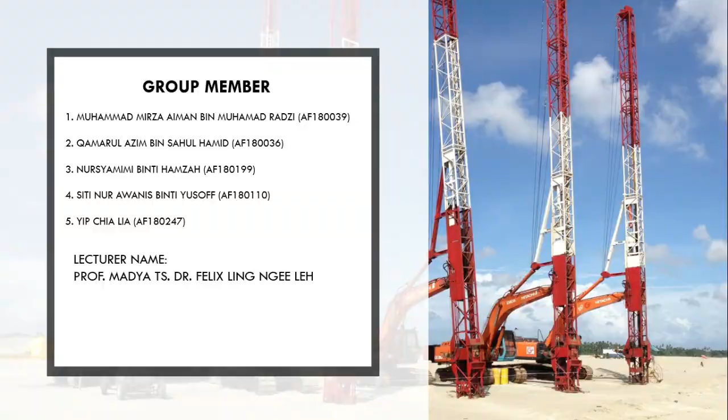So first, I would like to introduce a bit about our group project. Soil can be defined as uncemented aggregate of mineral grains and decayed organic matter, with liquid and gas in the empty spaces between solid particles. Soil is also one of the important materials used to support the structural foundation and act as the base of the building that will be constructed.

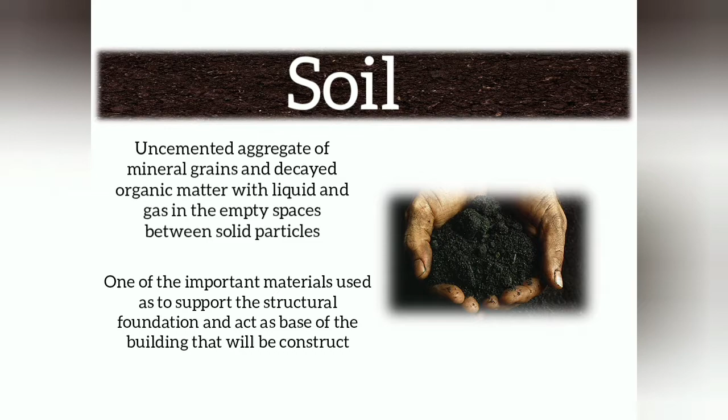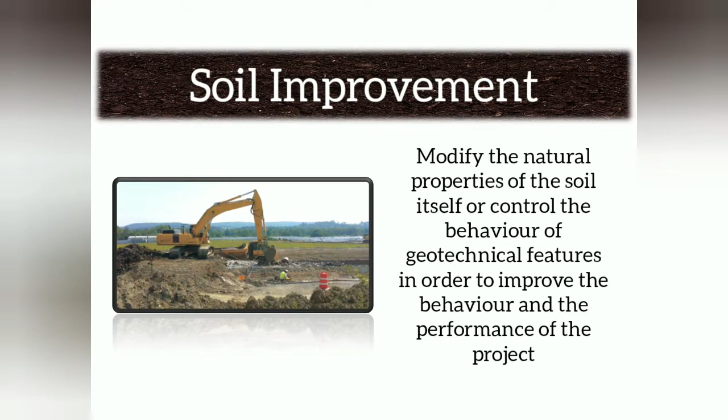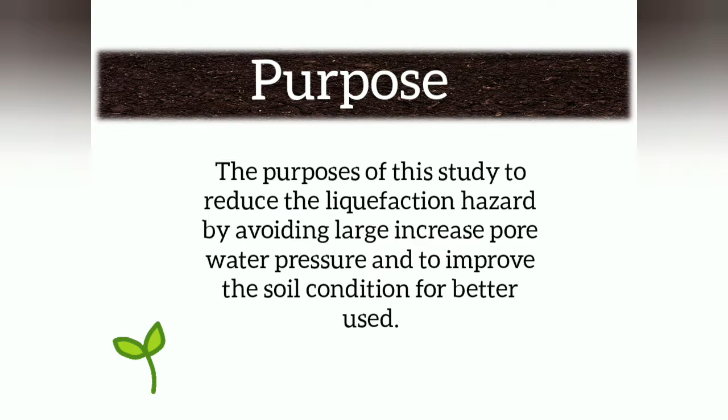Soil improvement: the purpose of soil improvement is to modify the natural properties of the soil itself or control the behavior of geotechnical features in order to improve the behavior and performance of the project. The purpose of this study is to reduce the liquefaction hazard by avoiding large increased pore water pressure and to improve the soil condition for better use.

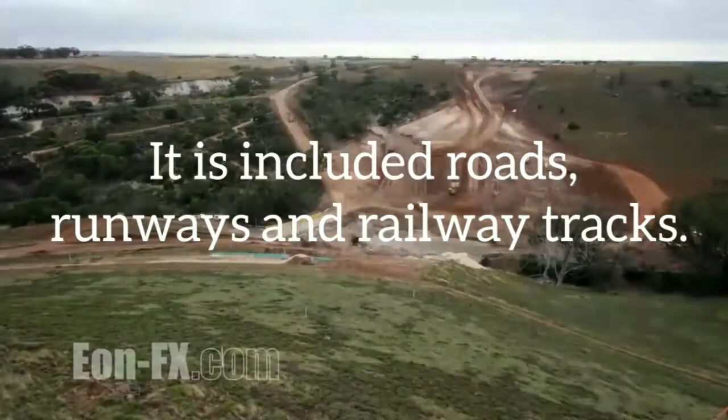The soil condition is very important for design and construction of any structure. It includes roads, runways, and railway tracks. Besides, the most suitable foundation for the superstructure is also important. The foundation engineer will follow a decision-making process to form the most suitable foundation.

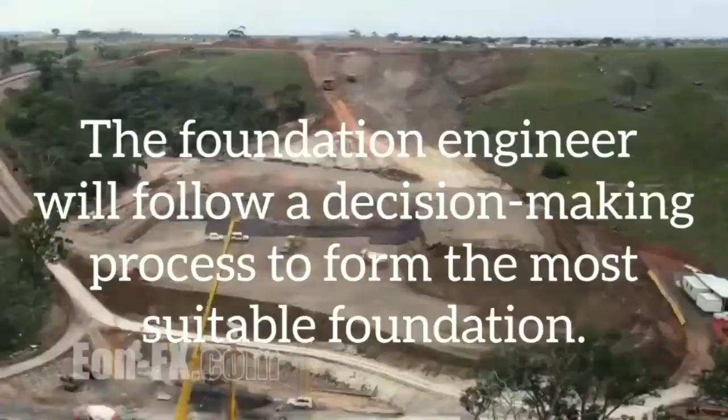These are a few conditions that ground or soil will be considered. Abandon the project: this might be considered a practical solution only when another suitable site can be found and no compelling commitments require the project to remain at the location in question, or when the cost estimates are considered to be impractical.

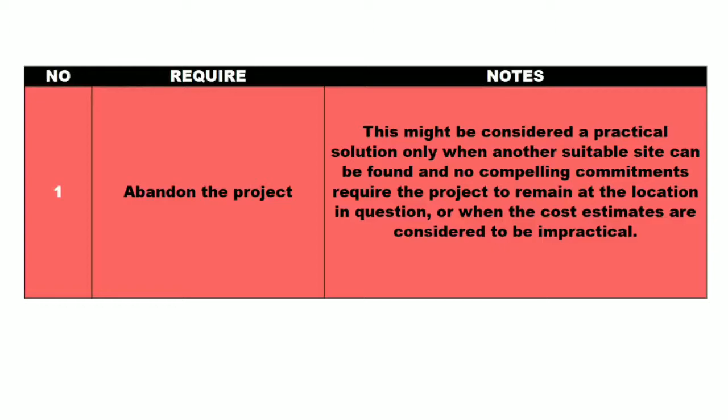Excavate and replace the existing poor soil. This method was common practice for many years, but has declined in use due to cost restraints for materials and hauling, availability and cost of select materials, and environmental issues.

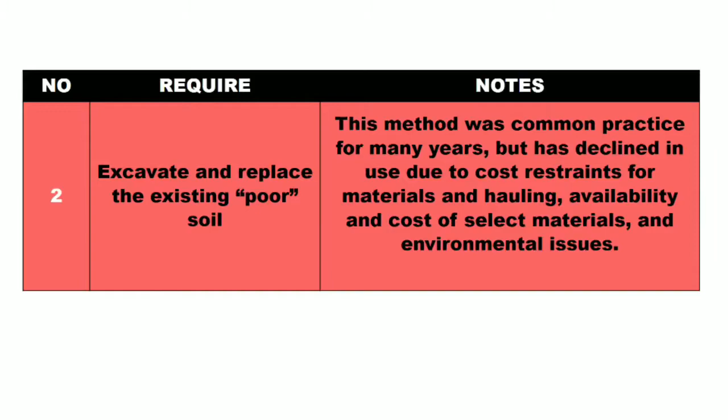Redesign the project. A common example is the use of driven piles and drilled shafts to bypass soft, weak, and compressible soils by transferring substantial applied loads to a suitable bearing strata.

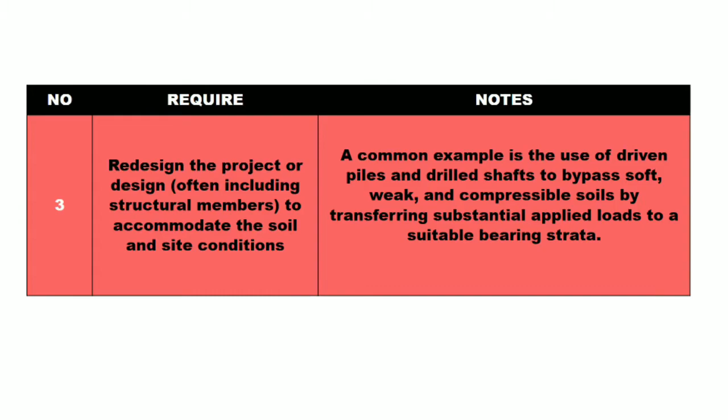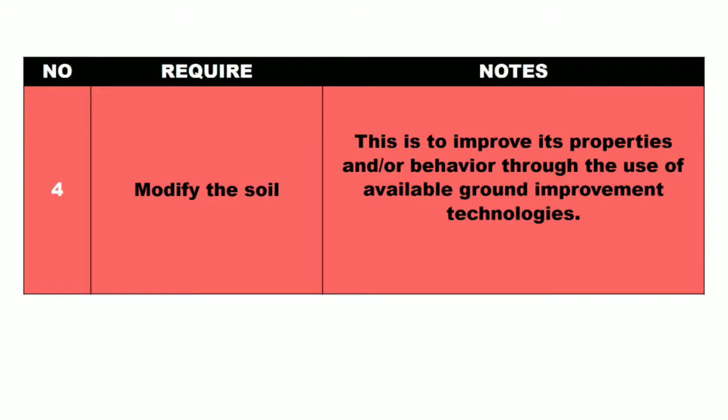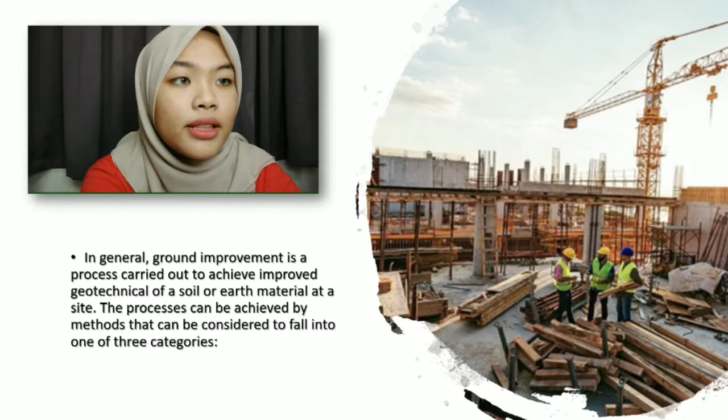Modify the soil: this is to improve its properties and behavior through the use of available ground improvement technologies. In general, ground improvement is a process carried out to achieve improved geotechnical properties of a soil or earth material at the site. The process can be achieved by methods that fall into one of three categories.

First, modification without the addition of any other material. Second, modification including adding certain materials to the soil or ground. Third, modification by providing reinforcement or inclusions into the soil or ground.

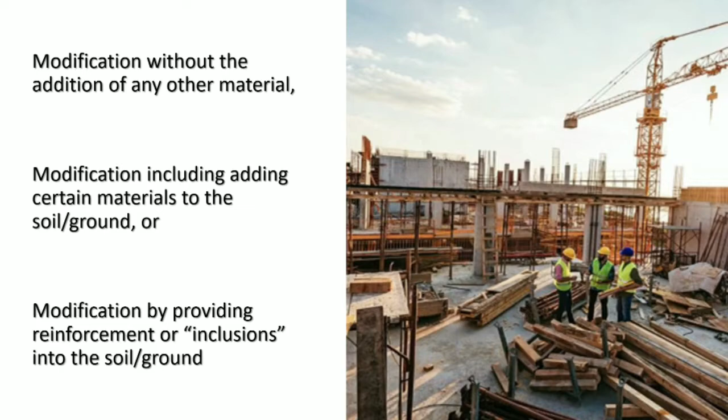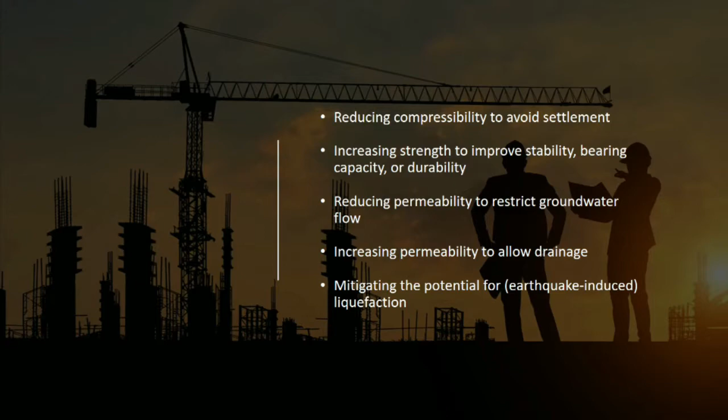The ground improvement objectives usually are: first, reducing compressibility to avoid settlement. Second, increasing strength to improve stability, bearing capacity, or durability. Third, reducing permeability to restrict groundwater flow. Fourth, increasing permeability to allow drainage. Fifth, mitigating the potential for earthquake-induced liquefaction.

There are three main techniques in improving soil condition: mechanical techniques, chemical techniques, and polymer techniques. Mechanical technique was the first method introduced. It is known by mixing two or more types of soils to obtain a material that achieves the specification. The soil blending may take place at the construction site, at a central plant, or at a borrow area.

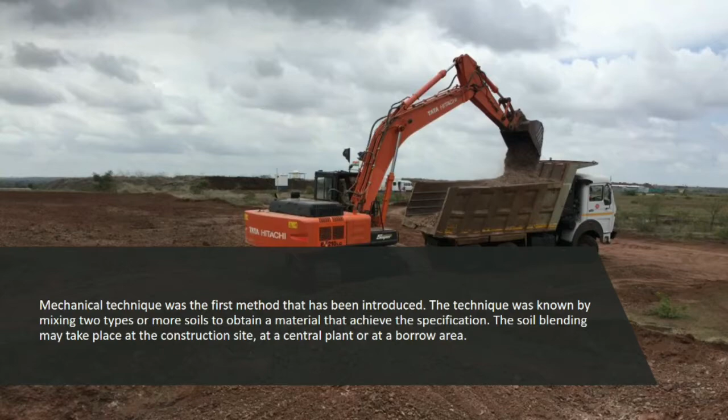For chemical techniques, ground quality is improved by adding different chemical compounds to the soil to reduce the problem. Methods used to chemically improve the soil include addition of sulfates, desalination, addition of gypsum, and admixture of soil.

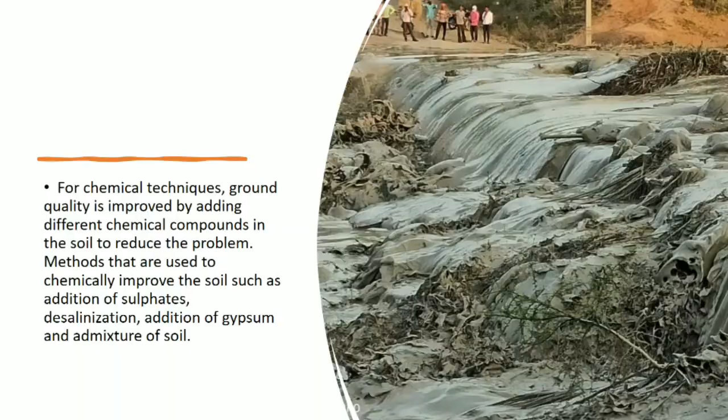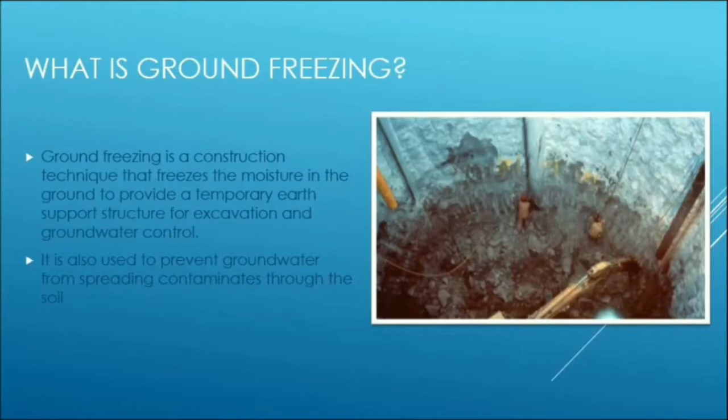Ground freezing is a construction technique that freezes the moisture in the ground to provide a temporary earth support structure for excavation and groundwater control. It is also used to prevent groundwater from spreading contaminants through the soil. The process is relatively straightforward.

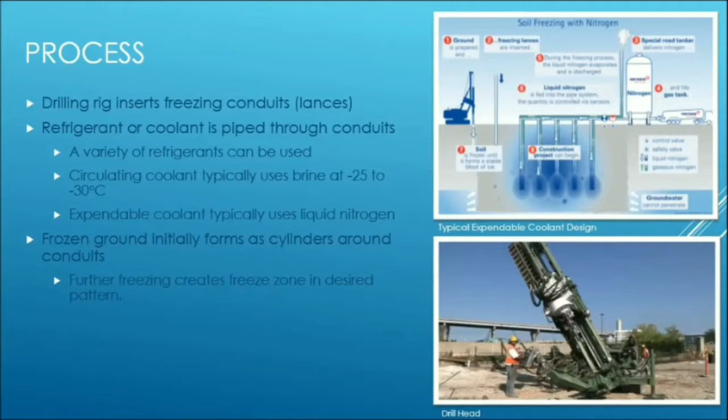A drilling rig inserts freezing conduits, which are called lances. The refrigerant or coolant is piped through the conduits. A variety of refrigerants can be used. Circulating coolant typically uses brine at -25 to -30 degrees Celsius. Expendable coolant typically uses liquid nitrogen. Frozen ground initially forms cylinders around the conduits, while further freezing creates a freezing zone in the desired pattern.

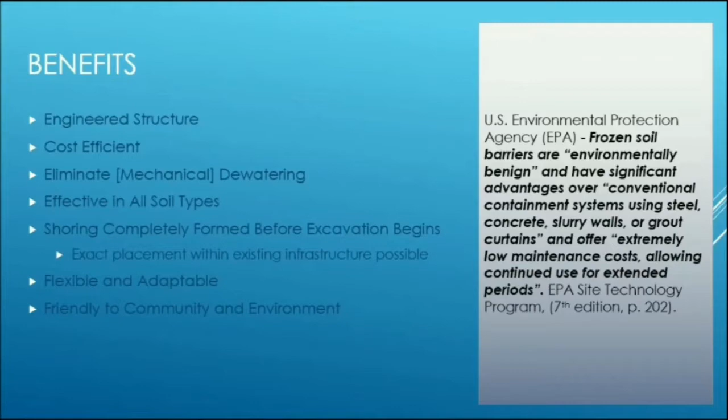The benefits of ground freezing: it is an engineered structure, it is cost efficient, it eliminates mechanical dewatering, effective in all soil types, shoring completely formed before excavation begins, flexible and adaptable, and eco-friendly.

The drawbacks of this system: it takes a long freezing time, usually 6 to 12 weeks, which does not include installation time beforehand. Next, the refrigeration equipment space needed, its high energy cost, and lastly, the hazardous chemicals in refrigerants and coolants.

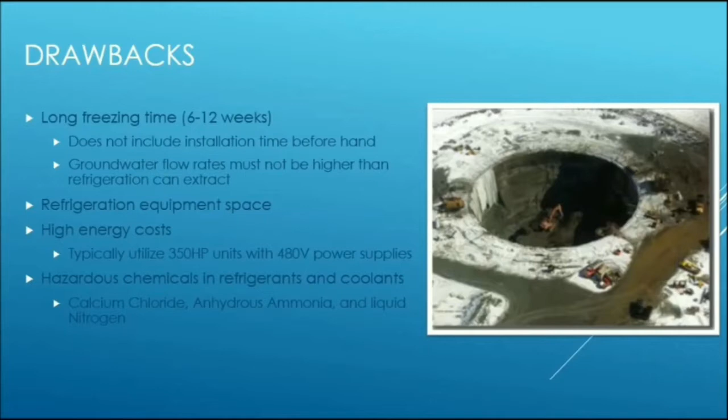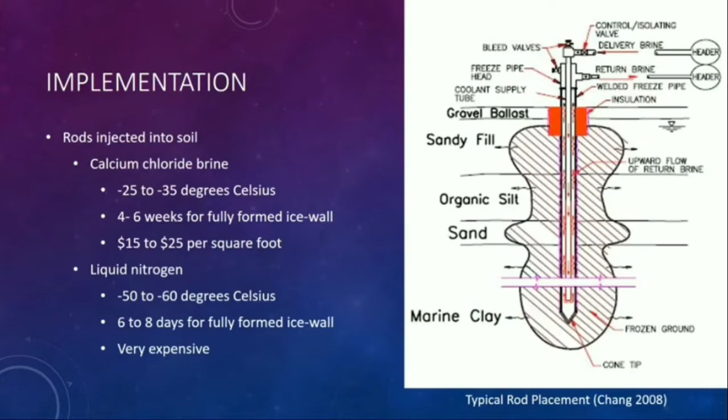A little basic implementation for the system, which is very simple: rods are injected into the soil concerned and pumped with either calcium chloride brine or liquid nitrogen. Calcium chloride is the cheaper of the two methods, with a temperature of -25.

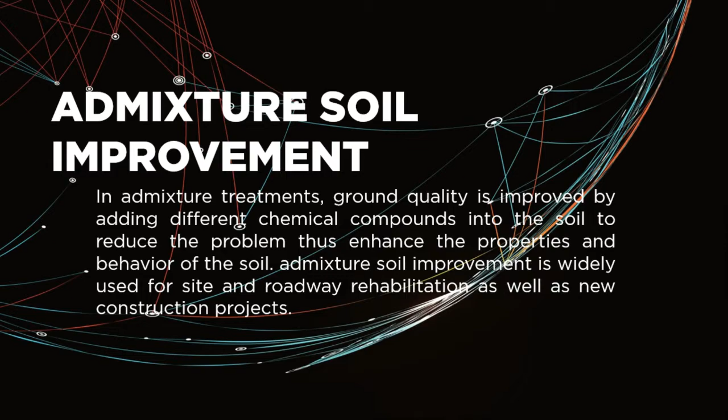In admixture treatments, ground quality is improved by adding different chemical compounds into the soil to reduce problems, thus enhancing the properties and behavior of the soil. Admixture soil improvement is widely used for site and roadway rehabilitation as well as new construction projects.

Admixture soil improvement can be greatly beneficial in drying up wet soil, improving strength, including solidification of waste for disposal assistance, providing volume stability, reducing swell, controlling shrinkage, improving working platform and workability of soils, reducing thickness of roadway layers, and slope stabilization.

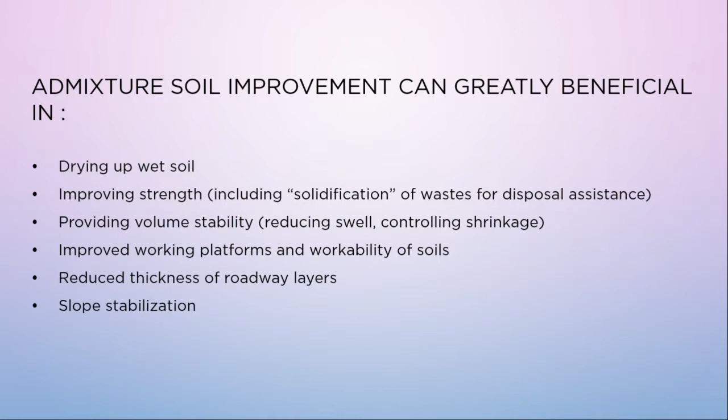For our case study, we use fly ash for the admixture. Pulverized fly ash is similar to granulated blast furnace slag. PFA is a chemical additive consisting mainly of silicon and aluminum compounds, and it's a byproduct of the combustion of coal.

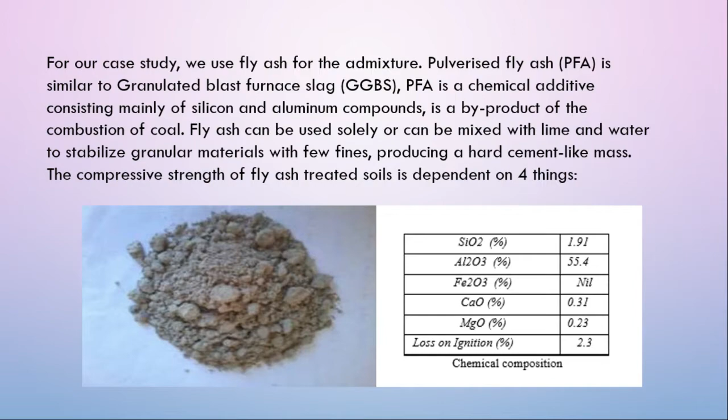Fly ash can be used solely or mixed with lime and water to stabilize granular materials with few fines, producing a hard cement-like mass. The compressive strength of fly ash treated soils is dependent on 4 things.

Number 1 is in-place soil properties. The plasticity of soils treated with Class C or other high calcium fly ash is influenced by the type of clay minerals present in the soil and their absorbed water. Soils containing more than 10% sulfates have been prone to swell excessively in some applications. Also, organic soils are difficult to stabilize using fly ash.

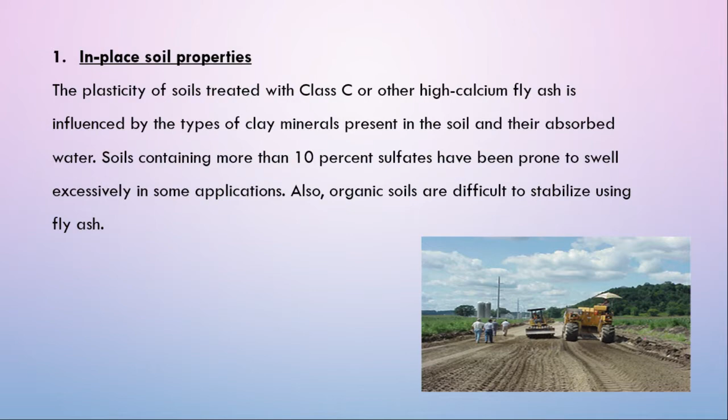Number 2 is delay time. Delay time is the elapsed time measured between when the fly ash first comes into contact with water and final compaction of the soil, fly ash, and water mixture. Compressive strength is highly dependent upon delay time. Both density and strength are reduced with increasing delay to final compaction.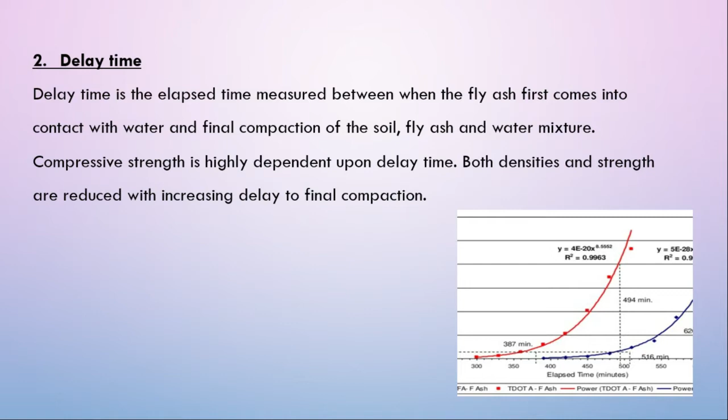Number 3 is moisture content at time of compaction. The water content of the fly ash stabilized soil mixture affects the strength. The maximum strength realized in soil fly ash mixtures generally occurs at moisture contents below the optimum moisture content for density.

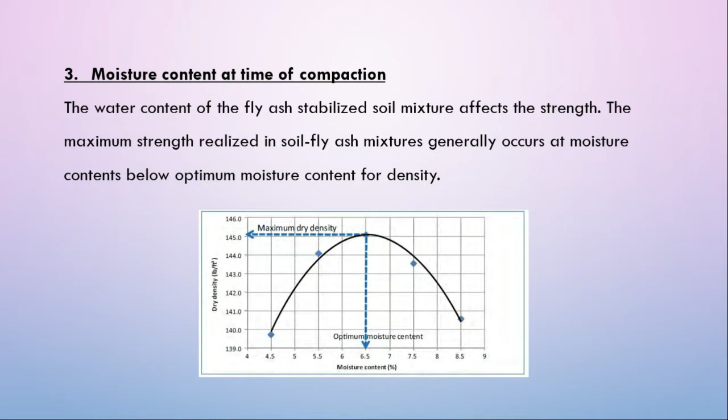Number 4 is fly ash addition ratio. Typical fly ash addition rates are 8% to 16% based on dry weight of the soil. The addition rate depends on the nature of the soil, the characteristics of the fly ash, and the strength desired. The addition rate must be determined by laboratory mix design testing. In general, the higher the addition rate, the higher the realized compressive strength.

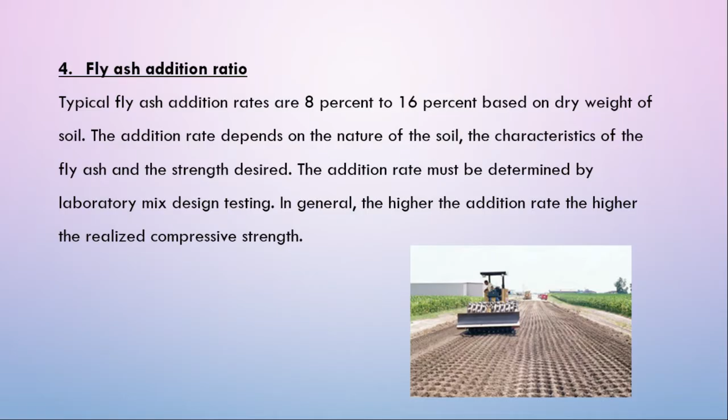Soil improvement processes are usually classified by application, either mechanical or chemical technique. Soil improvement techniques are utilized to change ground properties to achieve favorable ground conditions for a specific purpose, for example, densification of soil, accelerating consolidation, usage of admixture, and others. Mechanical techniques are the oldest techniques utilized to stabilize the soil layer.

I would like to present about ground freezing. Ground freezing is an improvement method in which refrigeration is used to freeze the water molecules in the soil. There are 2 different ground freezing technologies: liquid nitrogen method and brine freezing method.

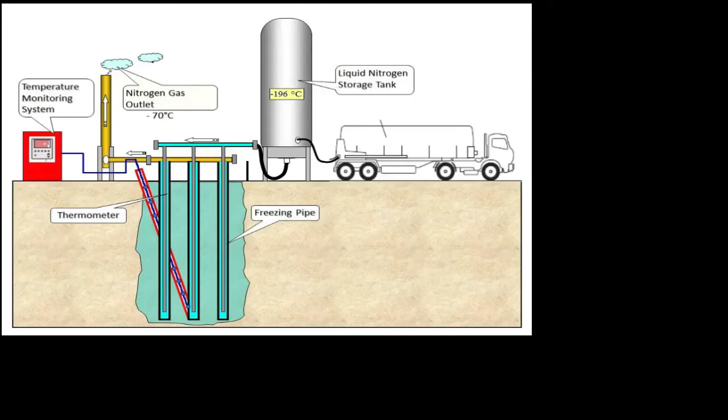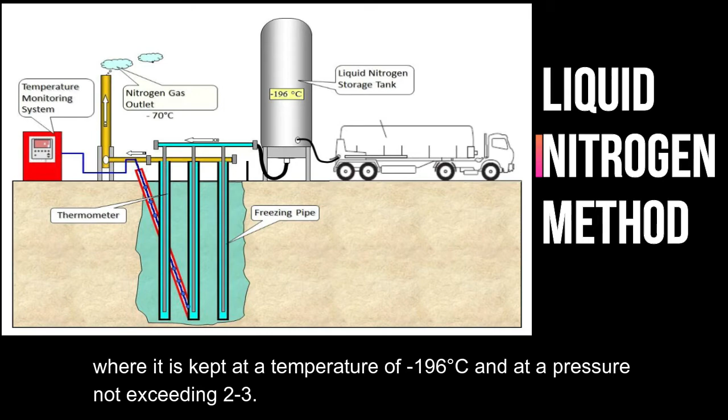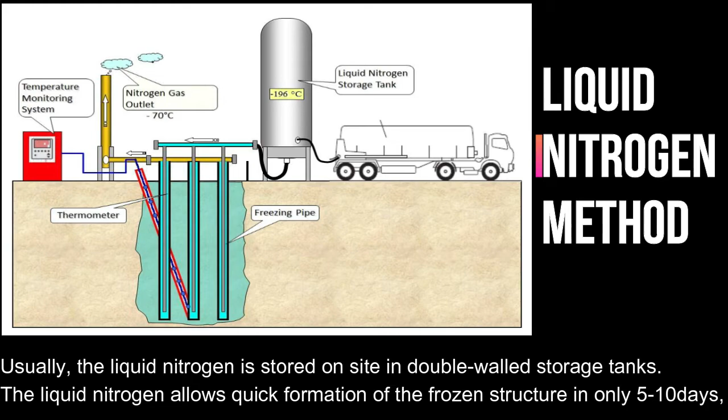Liquid nitrogen is obtained by air distillation and transported by truck to the site in special tanks, where it is kept at a temperature of -196 degrees Celsius and at a pressure not exceeding 2 to 3. Usually, the liquid nitrogen is stored on site in a double-wall storage tank. The liquid nitrogen allows quick formation of the frozen structure in only 5 to 10 days, depending on soil condition, groundwater temperature, and the distance between pipes.

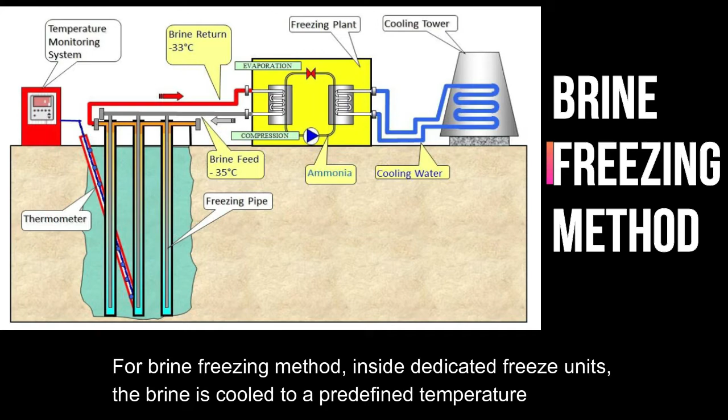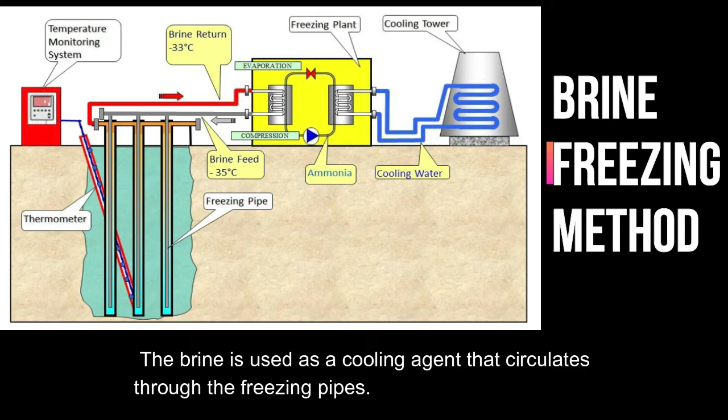For the brine freezing method, inside a dedicated freeze unit, the brine is cooled to a predefined temperature and afterward pumped through the freezing pipe in a closed circuit and back to the chiller. The primary cooling agent, usually ammonia, circulates inside the freezing plant. The brine is used as a cooling agent that circulates through the freezing pipes. By changing the salt concentration in the solution, different melting points can be achieved. A basic requirement for brine freezing is an absolutely tight circuit.

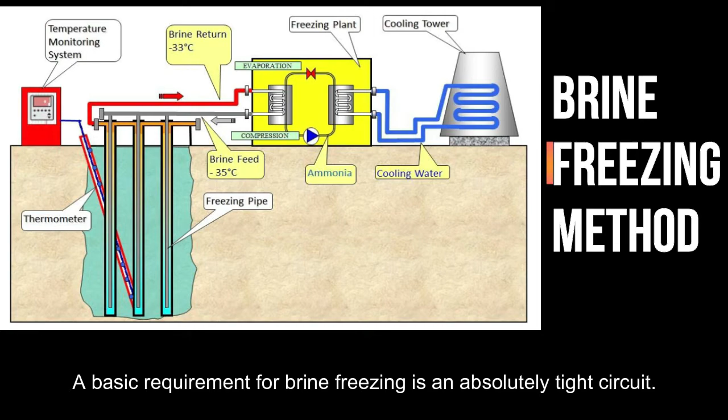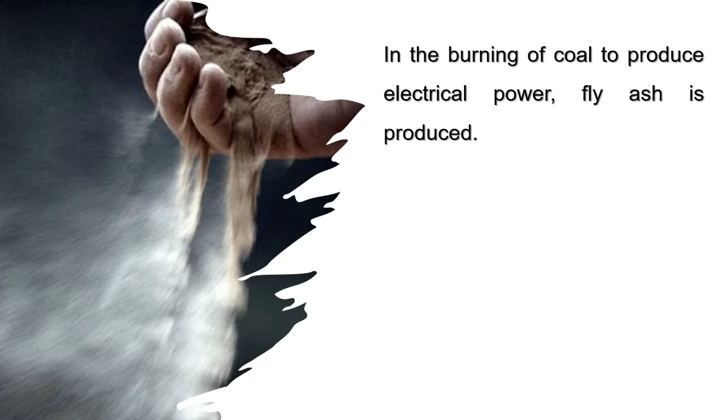Application for chemical techniques: in the burning of coal to produce electrical power, fly ash is produced. The fly ash is produced dry within the precipitators of the power station, and water is conventionally added to produce an aqueous slurry for disposal by pumping to an ash dam.

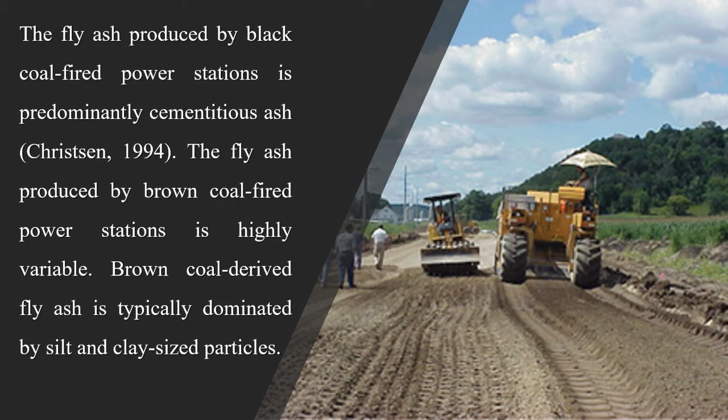The fly ash produced by black coal-fired power stations is predominantly cementitious ash, by Christsen, 1994. The fly ash produced by brown coal-fired power stations is highly variable. Brown coal-derived fly ash is typically dominated by silt and clay-sized particles. The disposal of thickened phase fly ash is increasingly common to reduce storage volume and improve the dewatering, density, and shear strength of the fly ash.

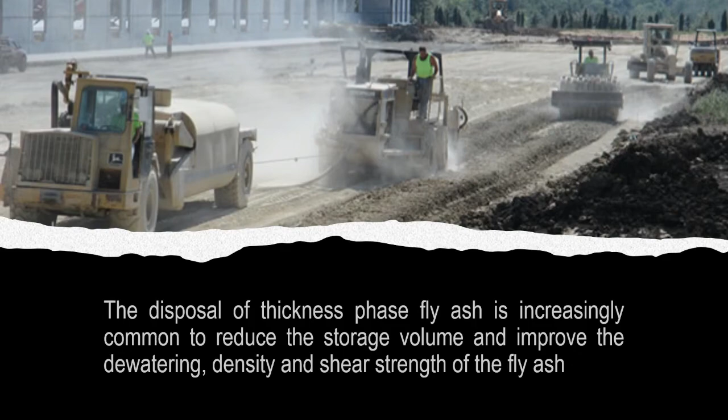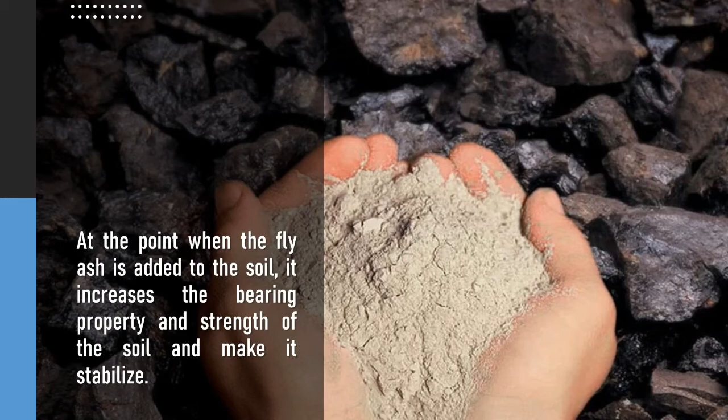At the point when the fly ash is added to the soil, it increases the bearing property and strength of the soil and makes it stable.

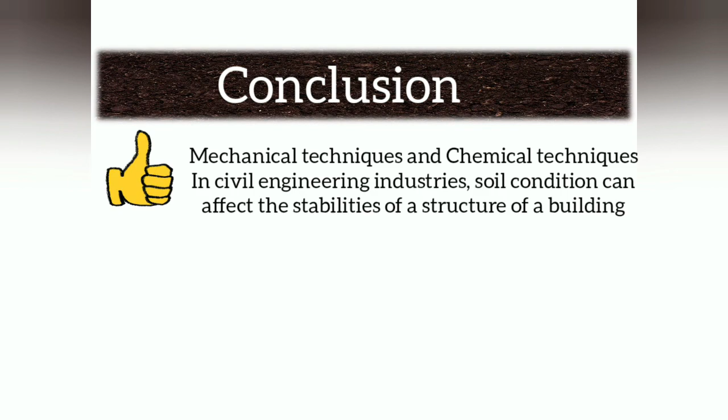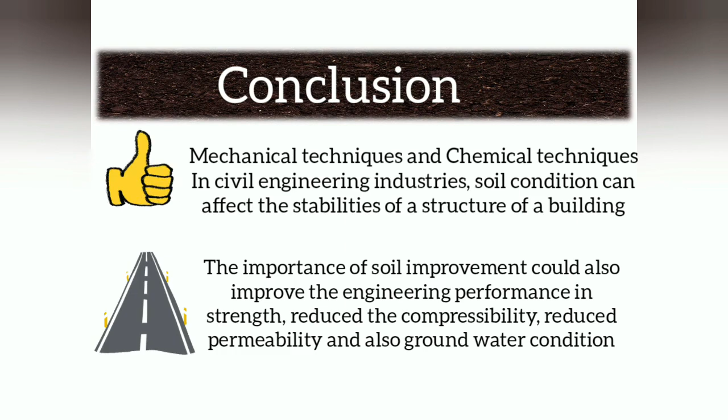In our case study, there are two techniques that we propose: mechanical technique and chemical technique. In civil engineering industries, soil condition can affect the stability of a structure. Therefore, soil improvement is important to improve the soil structure. The improvement in soil structure can also improve engineering performance in strength, reduce compressibility, reduce permeability, and improve groundwater condition. That's all from my group, and thank you for listening.